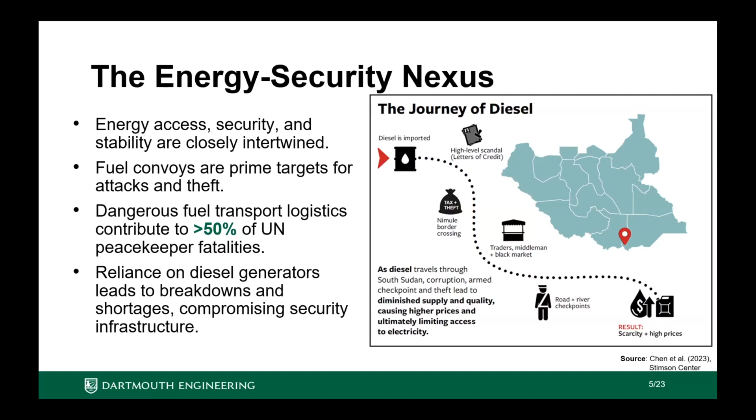Here is a staggering number. More than 50% of the UN peacekeeper fatalities happen because they're trying to protect the fuel convoys, right? It's a really big deal. And then there are lots of problems with diesel generators. We know they're bad for the environment, bad for climate change, bad because these are old equipment, bad with breakdowns. There are clear fuel shortages whenever something happens with the security side of things.

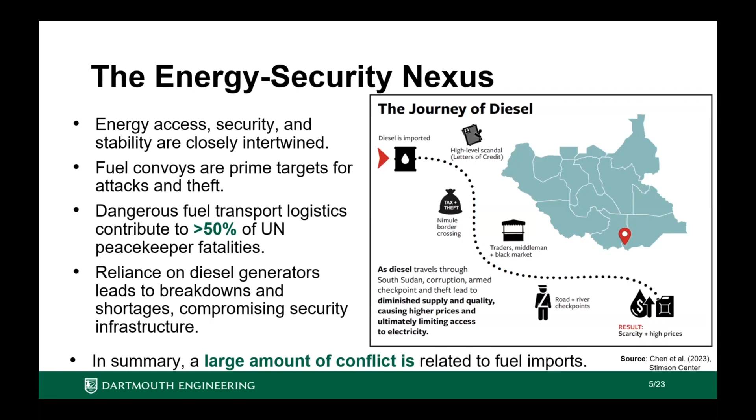So in summary, there is a large amount of conflict, and a lot of it is affiliated with the whole process of fuel imports, right? So the idea here is, what if we can actually somehow find a way to bypass the dependence on this particular flow of fuel, in this example coming from Uganda to South Sudan, but this situation exists to a variety of extents in many other countries as well. So what can we do here?

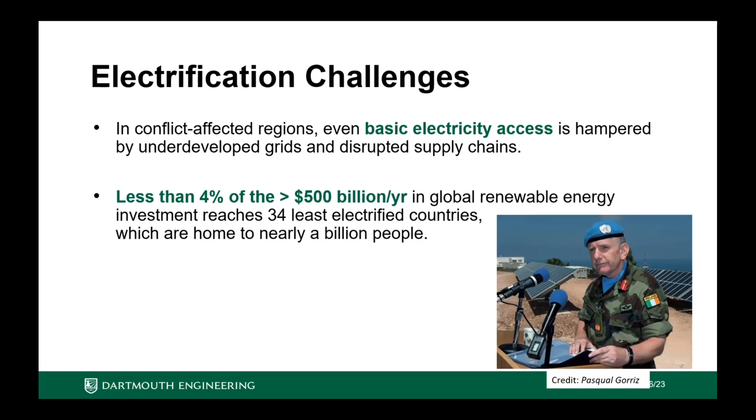Let's think about electricity. So in many of these conflict-affected regions, there is almost no access to an electrical grid, and things are not particularly getting better as we sit here and think about this. Less than 4% of the $500 billion per year in global renewable energy investments are apparently going to any of these 34 least electrified countries. So that's a problem.

So clearly, we can make an argument that maybe we should try to consume less, but there is a very strong argument that these countries need to have access to electricity, to basic things such as running a fan, having a light, so that when the sun sets, you still have some way of knowing what's going on, and charging their mobile phones and things like that.

So what is happening in these places in parallel to these energy challenges is that we have a lot of UN peacekeeping infrastructure. So these troops are placed there with the aim to stabilize the fragile regions. And what they do is things like infrastructure investment, political agreements, security guarantees. There's lots of troops and personnel. They require electricity in various remote locations. So what they do is they run diesel generators, right?

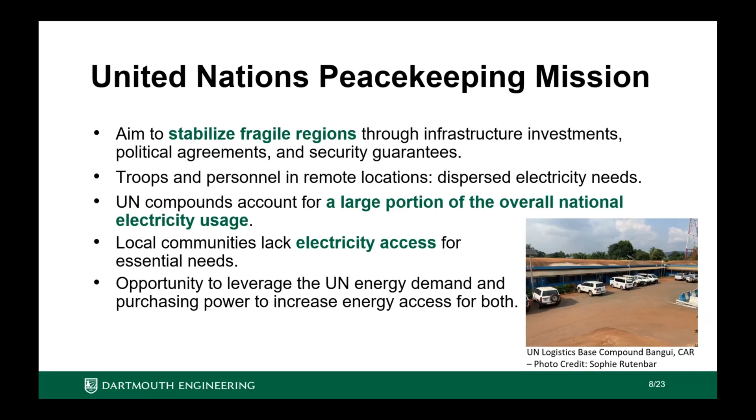So there is this huge contrast between those who have some electricity access and those who have none. But on the bright side, this also creates an opportunity to leverage this ability of the United Nations to purchase power in these places. All right. So I still have time to talk about happier things. So lots of challenges. You're presumably quite depressed at this time. So let me show you some good things, right?

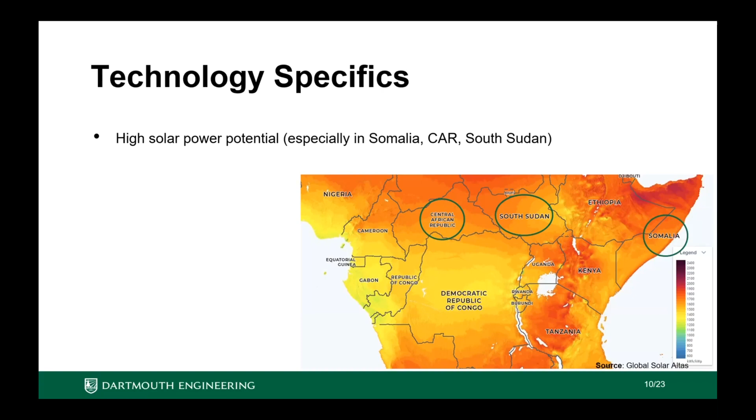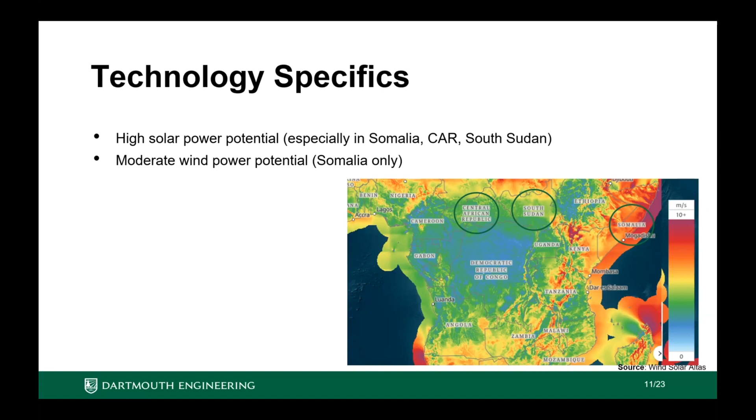So one good thing is solar potential. These places have great availability of solar power. I'm giving you some examples here: Central African Republic, South Sudan, Somalia, three particular places that we focused on in this research. You see this availability of solar to be pretty high in all of these places. What about wind? Yeah, it's a little bit of a mixed bag. Somalia has some wind, the others have less so, but nevertheless, overall, there is a tremendous potential in terms of generating more than enough energy that you would need to serve all the population needs in these areas. So in theory, we're going to have a path forward, right?

So what are the practical challenges to bring this theoretical idea to practice? First of all, it's not clear that we know what the different parties are thinking. So who are the parties here? So we have folks like the various United Nations agencies, and UN is big. Different departments within UN don't necessarily know what the other departments are wanting or doing, right? But then UN is a tiny part of this. There's the local governments, there's the national governments, there are various other powerful organizations, let's say, with a variety of degrees of military abilities and combat potential.

There is the local community, the people who are trying to make ends meet on an ongoing basis. And then, if we want to make any difference here, we need to put in some money to purchase the equipment for solar, wind, batteries, etc., which means we have to talk about the private investors. And so, as a group, what are these various people thinking? They're probably thinking about these. I say probably because we have talked to a lot of them. So I think what they're thinking about can be summarized as these four main objectives.

There is a lot of interest in reducing reliance on diesel. And yes, some people really care about environment. Others purely care about the security angle of this. Either way, they care about reducing reliance on diesel. They want to minimize upfront cost because getting large investments, millions of dollars, into green renewable energy infrastructure in these places with a high degree of uncertainty about everything is hard. So you do not want to take the challenge of generating enough capital upfront as an easy thing, right? That's a big deal. And then you want to have as reliable an infrastructure as you can provide.

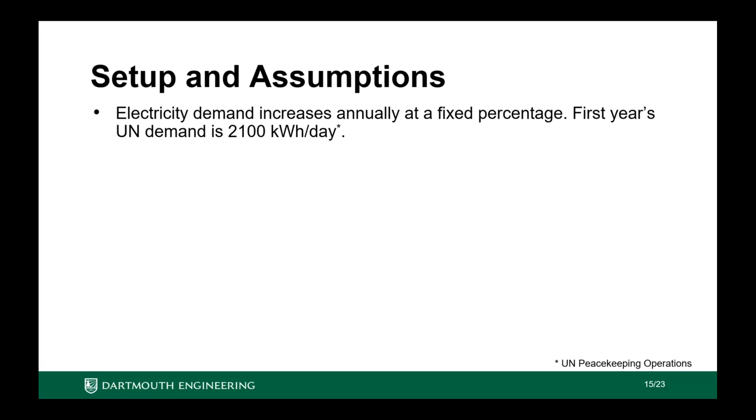make some assumptions. And one of the scarcest things to come by here is data, right? We have almost no public data set that we can just go to and grab a bunch of numbers and then crunch them, right? So there was a ton of effort needed in connecting with stakeholders and reading reports and collecting all this information. And that's what a lot of the students' time was spent doing. So for example, we were able to calculate some numbers and get a sense of the electricity demand.

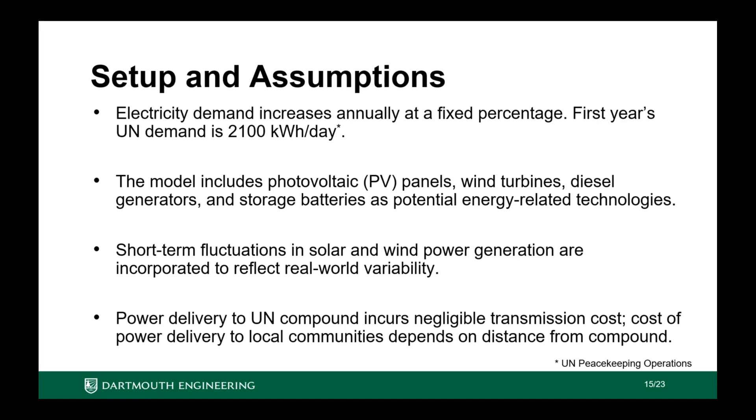We're going to focus on PV panels, wind turbines, diesel generators, because whether you like it or not, they are part of the solution, and then storage batteries. And when it comes to renewables, we need to keep in mind that there are going to be a lot of fluctuations, both in the short run as well as in the long run, because of various sources of uncertainty, and we need to account for them. And then about transmission cost, we need to make some assumptions depending on the geography of where these places are located. So let's jump into a little bit of an overview of the technical work that we did.

So the goal here is to design a hybrid renewable energy system. And we are going to focus on all those 4 objectives. For those of you who care about this, this is a problem that belongs to the category of stochastic programming problems with multiple objectives. What stochastic programming means is that you divide the world into two points in time, okay? One is what I call here and now. So here and now, I need to decide how much I want to invest in various equipment. How much do I want to invest in solar panels? How much in wind, in batteries? And maybe I want to buy or phase out some diesel generators, right? So that's the decision I have to make now.

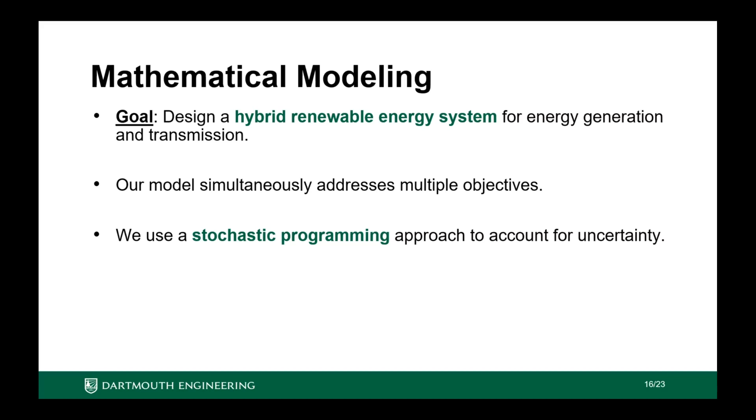And then later on, we have to wait and watch and figure out how we want to run this system. And how we run this system depends on the actual conditions at that time, which, I don't even know if it's going to rain tonight or not, right? So there is a lot of uncertainty. We cannot possibly know what's happening in Central African Republic on 16th of May 2 years from now, right? So there's a lot of uncertainty we have to deal with. So what stochastic programming does is that it divides the world into these 2 steps. It supports the long-term tactical decisions, and then it accounts for the short-term decisions related to how you want to do things on the hourly dispatch scheduling side.

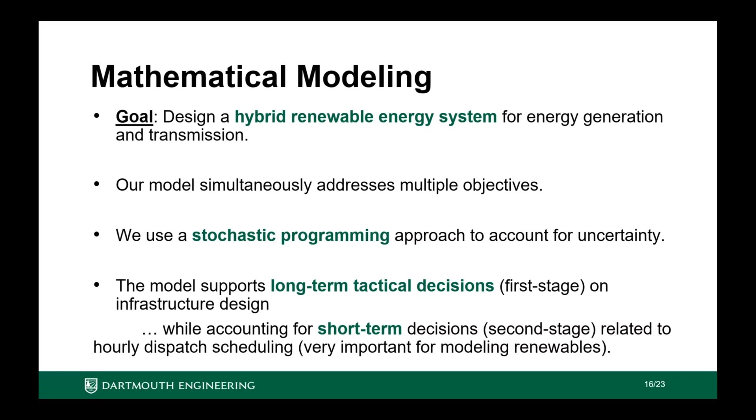And people who are more knowledgeable than me in this room, like Erin and many others, will tell you that this is as important or even more important than making these decisions, because if you forget this, then this might go horribly wrong. So there's a lot of complicated mathematics here. The specific things we do in the first stage is we try to decide what's the right amount of capacity to install for each technology and what's the fraction of electricity demand for the local community that we want to serve. Keep in mind that I would love to serve everybody, but that may or may not be the right thing to do. Serving everybody is one of the 4 objectives that we have, right? So we decide those things in the first stage, and then on the day of operations, we're going to decide renewable energy availability and then hourly dispatch schedule.

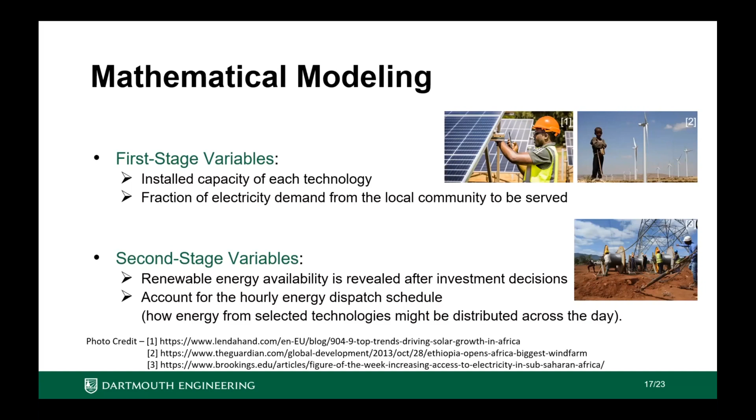So getting slightly geekier, there is this method called the epsilon constraints method, and it finds something called Pareto optimal solutions. This is important. What we are saying here is we do not want to go to decision makers and say, yeah, Georg, I understand you have this trade-off going on. I will tell you what's right for you. You just do this, trust my math, right? We do not do that.

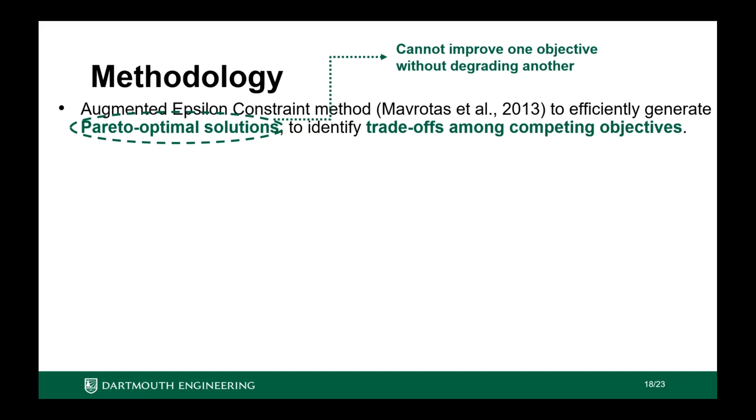What we do is we go to people and say, look, here are the various possible things you can physically do. And I can assure you that all of these are potentially good candidates. You have to make the decision. I can tell you that there are no other good candidates. What does it mean by good candidates? A good candidate is one where you cannot improve one objective without worsening another, right? As long as that's true, it's a good candidate, then it comes down to your preferences for what you want to choose among various good candidates. And that's the trade-off decision that you make.

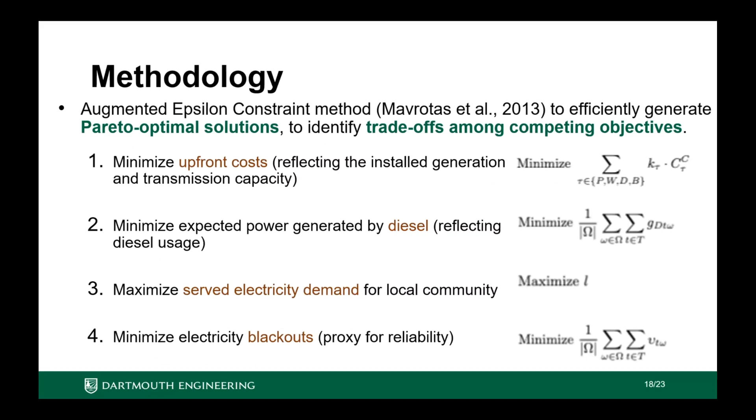So what are the objectives? We want to minimize upfront cost, minimize reliance on diesel. We want to serve as much of the community as possible and minimize blackouts, maximize reliability. Oh, sorry. This is the slide that says there's much more to it than I'm saying. But really, we just want to highlight that there are things that are pretty common sense. The amount of electricity that flows in equals the one that flows out. There are physical constraints on how PV panels, wind turbines, generators, batteries work. So all those are embedded in that math.

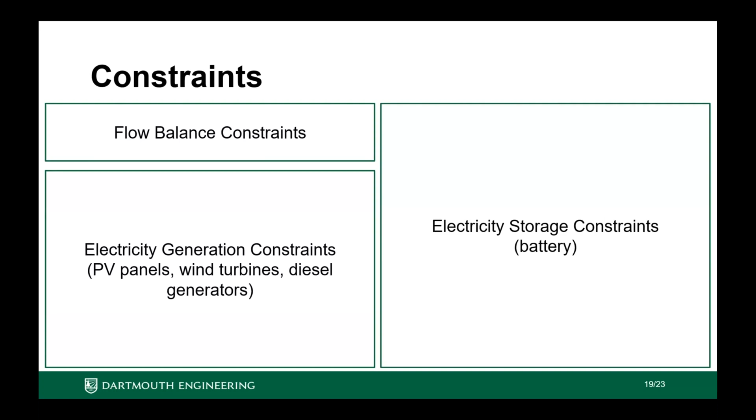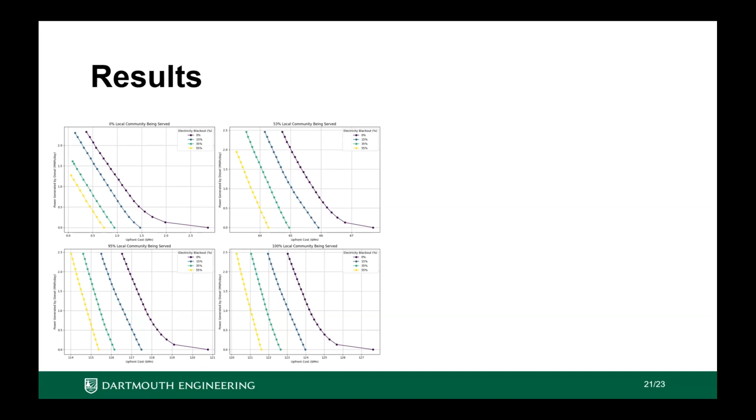Remember, this is quite different from the kind of research that happens for the developed country context, where I have here a data point where I say, well, what if I only provide a system that's 65% reliable? Anybody here who is happy with an electrical grid where 2/3 of the time you get electricity? Not too bad, right? No, it's horrible. I know that, but the sad reality is that compared to not having any electricity at all, it might be a pretty good situation. So these are the hard trade-offs we have to look at.

And then my last slide says that this stuff actually led to some really cool insights in terms of how to build the math and algorithms. I will give you one of them in the next 2 minutes, and then I will be done. Here's an example of what you would get if you rely on just the existing literature. Remember that 2-step? We have to decide what to do now and what to do later. And what to do later depends on exactly what transpires on that day. So you have to look at a few possibilities. How many possibilities should you look at? How many is good enough? We call them scenarios.

Ideally, if you look at very few possibilities, this is the only slide I wanted Klaus to not be there on, but sorry. Okay, let me get this right. Finish up right now. Thank you. I can leave again if you want.

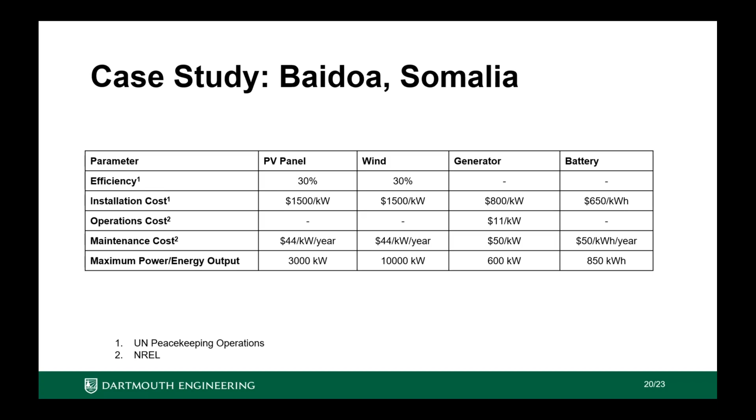Perfect. So we are looking at a 10-year horizon, by the way, because people said 20 years is crazy. Nobody knows what's happening in some of these places 2 years from now, right? So 10, 5, that's the kind of horizon we are looking at. That's something I didn't mention. However, there's one big assumption I'm making. I'm assuming that everything that happened in the last 20 years, so 20 multiplied by 365, 7,000 something days, is everything that can possibly happen in the next 5 years, right? You can all judge that assumption, but that's the assumption under which these are the true numbers. Good question.

Sam is here. Sam is working on a really nice project where you can actually try to find out the subspace of parameters where things go bad. And then you can sample more in that area to get the boundary between things going bad and not. And that's standard, because people who build turbine engine blades do that because they are concerned about failure. So that might be a way to use the 1900 much smarter. The paper is not finished yet, but I think that would be a nice way to enhance that.

Yeah, absolutely. I think what you are saying is that scenario reduction is a huge topic, right? And what we are assuming here is all that matters is the average case. Vanilla basic stochastic programming assumes averages are all that we care about, but like Klaus said, there is much more to it. You might want to focus on areas where things can go particularly bad, 100%. And one last sentence, this 15 is just a k-means clustering that people do. And they just take that and say, all right, this is the reality I'm going to assume. I'm simply saying that's actually pretty problematic. We need to do better.